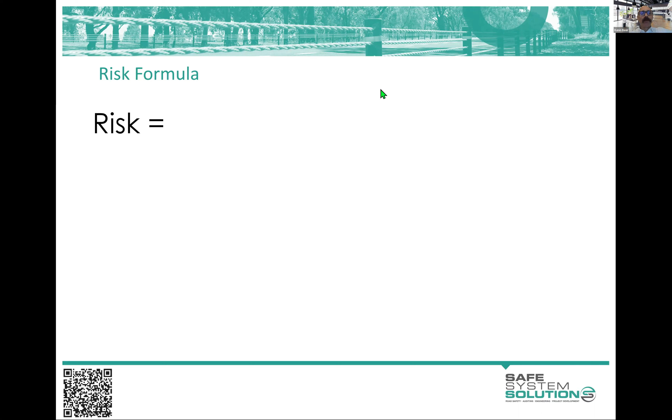Why not? I'll give a quick prize out for somebody who can give me a formula for risk. Anybody got the international formula for risk? Can anybody in the chat pop that down? Risk is something times something. Well done, Drew. Drew's on it. Prize for Drew. Likelihood times consequence is the international definition of risk, really.

And I'm not talking about just road safety risk. I'm talking about risk generally - financial risk, environmental risk, health risk. It's what is the chance a bad thing will happen, multiplied by the magnitude of badness. So what's the risk of recession? Well, it's the chance we go into recession multiplied by how deep a recession is. That's the risk of recession.

In a safe system assessment, we have used this as the definition of risk in road safety for a very long time. What's the chance of a crash multiplied by how bad is that crash going to be? Is it going to result in death and serious injury, or is it going to be just a minor fender bender, little scrapes in the car? That's the road safety risk.

In a safe system assessment, what we've actually done is extracted out exposure and the likelihood. So what does that mean? Well, that means how many people are exposed to this risk. Then what's the chance of it transpiring in a crash? And how bad will those crashes be? So that's how we're thinking about risk in a safe system assessment.

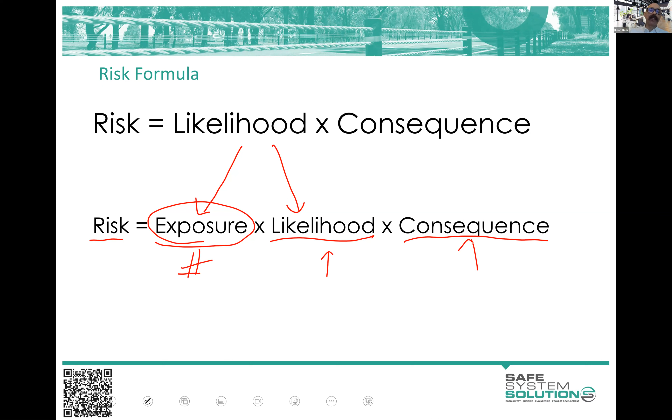So I'll go into that in a lot more detail, but just to help you clarify that in your mind - what are we talking about? Things that would affect the exposure to crashes on the road network.

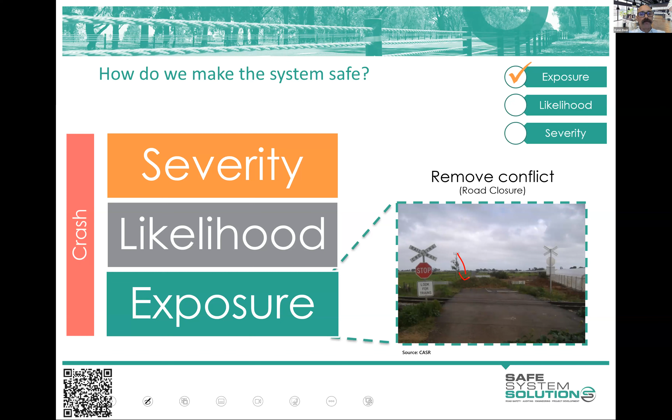Well, here's a photo. It's a little bit hard to see, but they've put a mound of dirt and a road closed sign on the other side of this railway level crossing. They have removed the exposure to crashes at this location. Okay, so that's an exposure example.

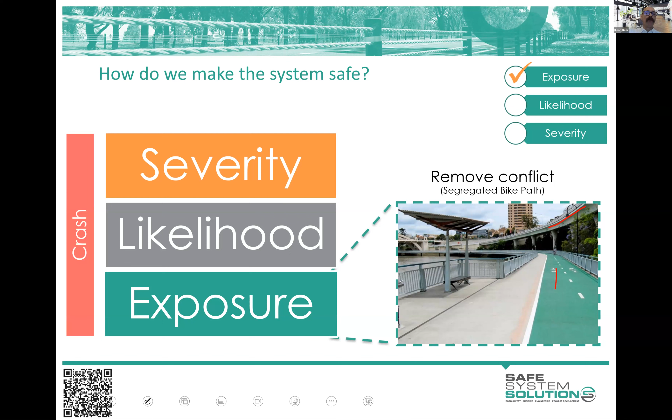Another example of removal of the exposure to crashes is if all of the cyclists and pedestrians are on their own separated path, not mixing with vehicle traffic - there is no exposure to vehicle to cyclist crashes in this, or we've lessened that exposure. There might be exposure to cyclist to pedestrian crashes, sure, but that other crash type, we've virtually eliminated the exposure.

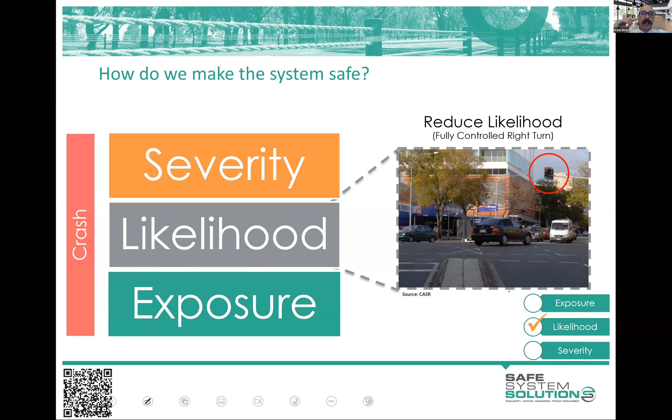It's just lessening the chance that they will happen in the first place. Traffic signals, they are all about the likelihood of crashes, trying to stop people crashing in the first place. This is an important thing to do, but remember, that's what a set of traffic signals does - it reduces the chance of crash.

The severity of the crash, when it happens, well, we really only have a small handful of things that we can use to influence the severity of crashes. We've got the speed, the mass of the vehicle, the angles that crashes happen at, the vulnerability of those involved, and the ways we absorb or dissipate energy. Because this is a physics sort of equation that we're working with here - it's the kinetic energy equation we're working with. When the crash is happening, how is the energy being managed?

How much energy is there, and how is it being managed? So if you can slow vehicles at the points where they're going to crash, we lessen the energy transfer.

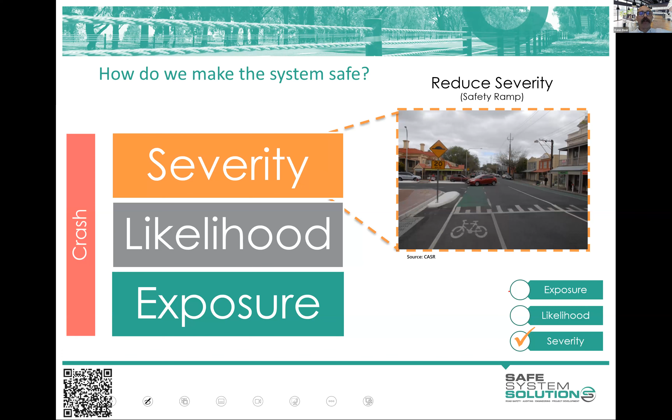Speed, or velocity, is a critical part in the energy equations. So something like a raised platform, slowing vehicles at that crash point, the conflict point, will lessen the severity of crashes. Or take a system like a road safety barrier: a vehicle hits the barrier and dissipates its energy over time, slowly coming to a stop rather than hitting a tree with an abrupt stop, or a culvert. That is about lessening the severity of the crash.

As soon as they hit that barrier system, that's a crash, but the severity of it will be less. Throughout the slides I use for the rest of this training, these little things will pop up, and I'll be saying, well, okay, barrier systems are all about the severity of crashes, which is a nice tick there. Sometimes things might influence both the likelihood and severity, but I'll help you out with that, because an important thing you need to be able to do as a safe system assessor is categorize things into either influencing exposure to crashes, likelihood of crashes, or severity of crashes, or some combination. So I'll be asking you to do that quite a bit throughout this course.

In fact, I'm going to give you a little assignment. It's a quick assignment at the end of this session, and you'll go away, look at an intersection, and start to categorize things into exposure, likelihood, or severity. And you will be marked on that one.

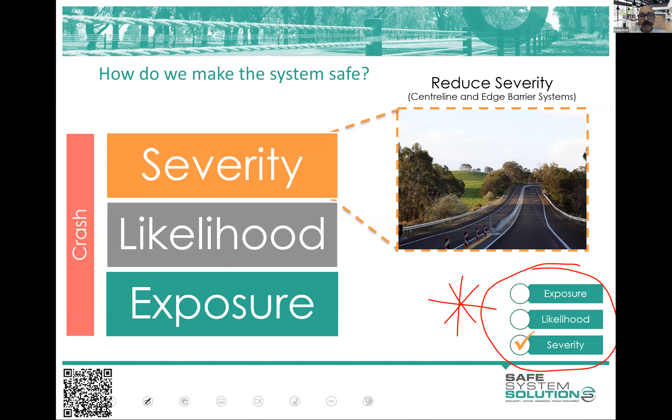Okay, so that's sort of caught us up to where we wanted to be at the end of last session. I'm just going to jump in here. We are recording.

This session is all about, I suppose, digging further into the infrastructure. We want to really start to unpack the kinetic energy thresholds for different crash types at intersections and at mid-block locations. How do we determine how bad a crash is going to be at an intersection? We'll delve into that. We're going to look at mid-blocks and intersections today, and fairly early on I'm going to get you doing a little bit of work around thinking about an intersection from that exposure, likelihood, severity perspective, and what we would do.

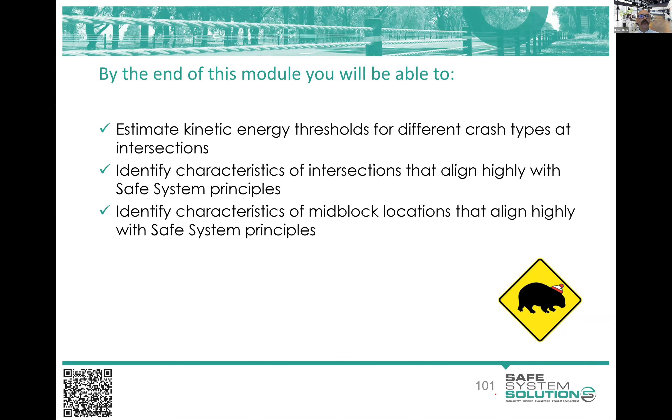Okay, so if you look at a route, for example, and I'll just draw a little bit on this here. If this is risk, and this is sort of chainage, you will see risk sort of bubbles along and then spikes. Okay, and it spikes at these intersections. It holds a certain degree of risk through mid-block locations, and mid-block, I mean between intersections, but it spikes at intersections.

It spikes at intersections because of, yes, this crash potential, but also vehicles are more likely to leave the road at intersections. They're more likely to leave the road because of another vehicle entering the intersection, and then the vehicle with speed avoiding that vehicle, or clipping the edge of that vehicle and spinning off the road, or a pedestrian stepping out, these sort of things happen.

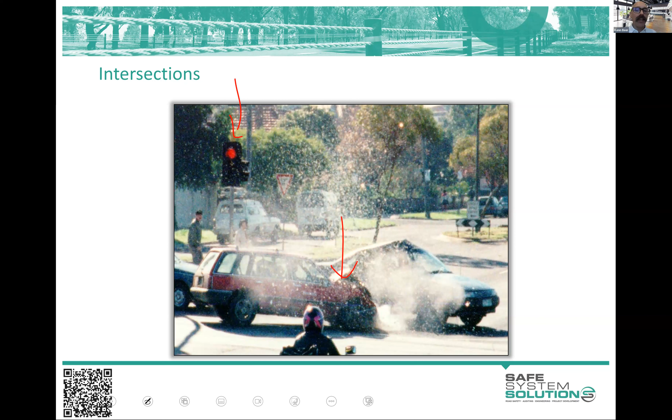Plus, we've made it much worse because they can hit a whole lot of solid things that have been placed around this intersection. So when we think about intersections, we want to holistically think about these types of crashes, the fact that pedestrians are going to need to be crossing, that we're going to have bikes coming through, but also vehicles leaving the road and what they hit.

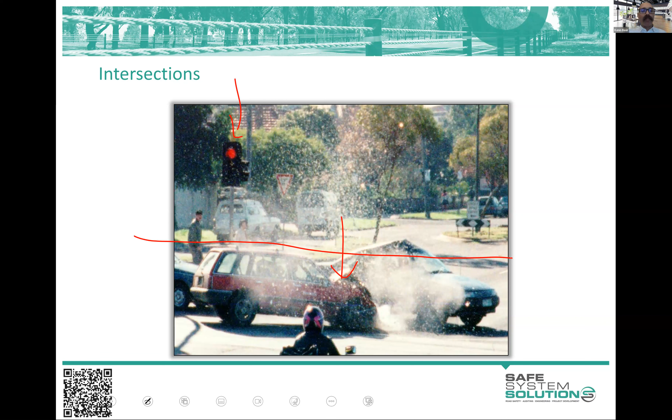Now, the Monash University Accident Research Centre came up with some general principles for safe system aligned intersections. These are very generic principles, but I think they're decent to think about. The first two are fewer vehicles and fewer intersections.

Can we get fewer vehicles going through this intersection, so lessen the exposure? Or can we have fewer intersections? Can we close off some intersections? Again, change the exposure. I always like people thinking about possible changes to exposure as an early thing.

The reality is it's very hard to influence exposure most of the time in practical reality, but we should think about it because it gives us our highest alignment with safe system principles if it can be done. If you're closing intersections, you've got to think about where are people going to now access what they need, or where are they going to come out, and are we just pushing the problem down the road? But nonetheless, it's a very good thing to think about.

Then when you're starting to talk about conflict point analysis and conflict at an intersection, that is a likelihood factor. So conflict points are about likelihood. Conflict points, if people don't understand the term, are basically the different spots at an intersection where crashes can happen based on the path of road users. I'll show you a conflict point diagram later.

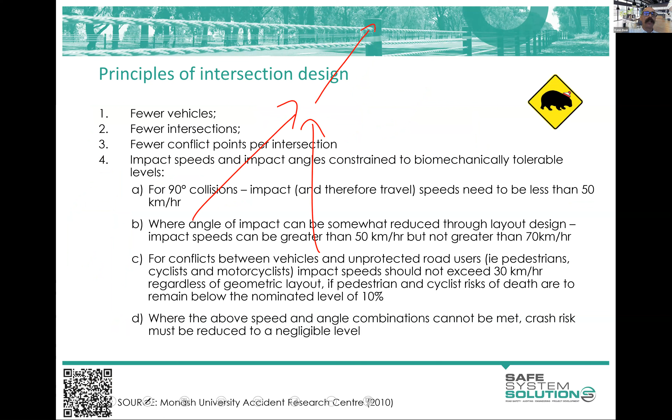Head-on crashes and the like, we're up around 70 kilometers an hour. Anything in between, if you can get some angle on your crashes, you're able to get around that 60 kilometer per hour mark. What do I mean by that? Well, go back to your year 10 vectors in physics class if you did it. If you crash at an angle, the energy gets pushed out to the environment more than crashing straight on, where it's a smaller exit of energy into the environment. You bounce off a bit, so if you're able to do that, you get some better allowance for energy.

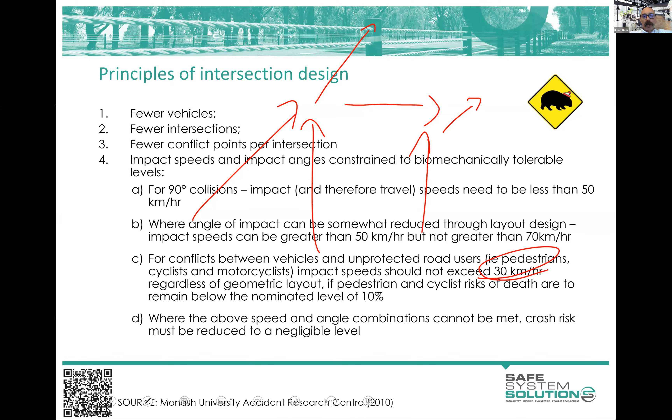Pedestrians, around that 30 kilometer per hour mark or below. So again, I've put some tables up here with these figures. I want you to really start to solidify these in your mind: 90-degree crashes between passenger vehicles, 50 kilometers per hour or below; get some more angle on it, 60 kilometers per hour or below; head-on, rear-end, 70 kilometers an hour or below.

The only way you can run an intersection above 80 kilometers per hour operating speed, not speed limit, is if you make it so that the delta V, the change in velocity, is within tolerable limits. You can have an acceleration lane, and the difference in speed between those vehicles sits within our tolerable limits, and we're okay.

You can crash two cars into each other if they're traveling 200 kilometers an hour and 210 kilometers an hour. That will be fine in the initial crash. You've got to think about how they leave the road then, if they leave the road. But that initial transfer of energy is within tolerable limits because the difference there is only 10.

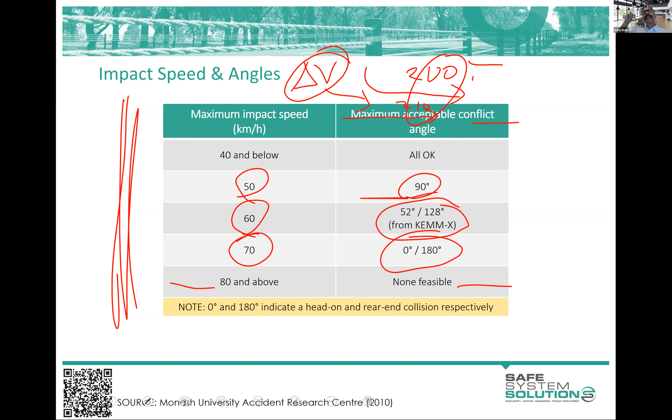So you can see that we're now starting to look at crashes from this energy management, this biomechanics of injury physics perspective. That's when the crash is now happening. How bad's it going to be?

So when you're doing a safe system assessment, you can start to come up with this sort of stuff. You don't actually need to be this precise on angles. I mean, if you're in CAD, you can easily do it, but you don't need to be this precise. You can simply say to yourself, okay, they're building a new intersection here, a vehicle coming out here being struck by a vehicle there, that's pretty close to 90 degrees, isn't it?

So that means 50 kilometers per hour is what we're thinking for the bullet vehicle speed. We want to be below that, 50 or below is what we want to get those vehicles down to at that point, because a crash is going to happen. Sure, we're going to do everything we can to stop that crash happening, but we've got to get our mindset in that it's going to happen.

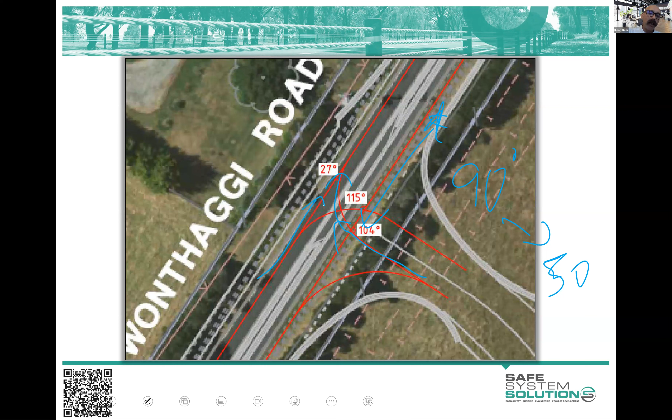So then we get over to the other side and we go, oh, okay, there's a bit more angle on that. So the energy's dissipated out a bit, 27 degrees. We can talk about 60 kilometers per hour for that side. That's about the threshold speed.

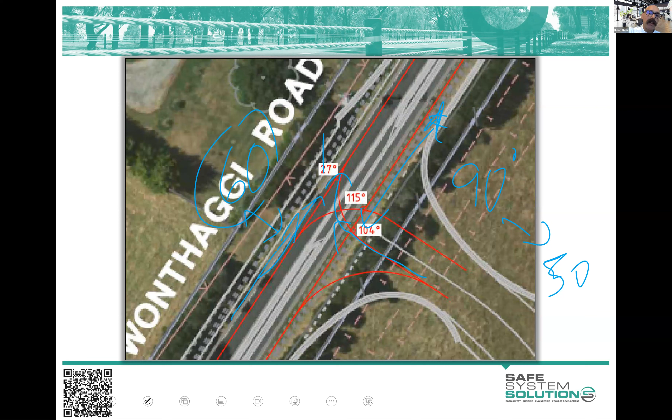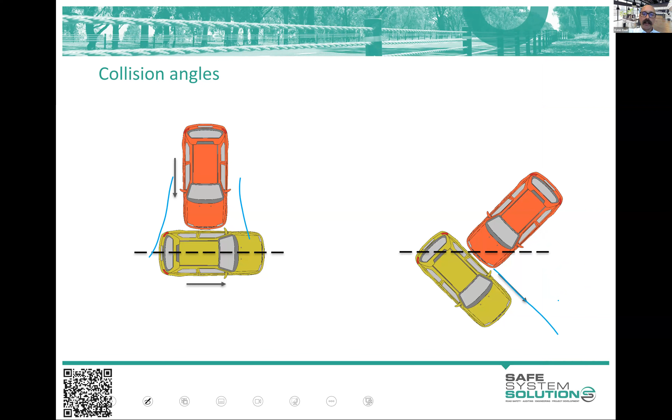Just a reminder there that we have secondary crashes to deal with at intersections. Vehicles hit each other, but they don't always hit each other squarely. Sometimes they hit the back and they clip off. They hit the front, they avoid each other, but they go off in these different directions.

And this has been a lot of clip off and the like. And of course, if you replot that to vehicles coming in this way, you probably don't need to do a lot of research. A bit of logic would say that, yes, okay, they're all going to, the bulk of them are going to be out in that area where they hit poles and culverts and have those secondary death and serious injury.

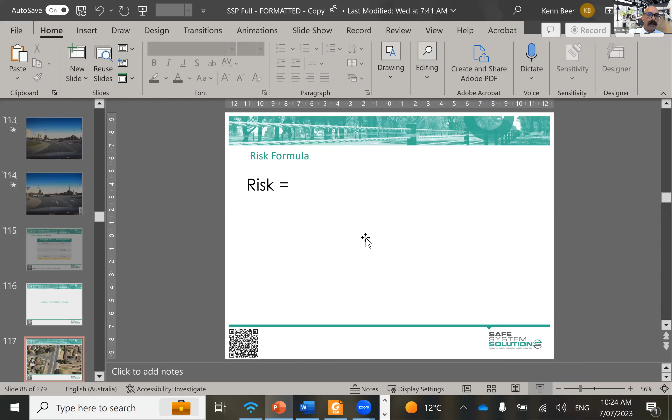Ooh. Oh no, what have I done? Okay. Running at 70 kilometers per hour. I'll just put 70 there.

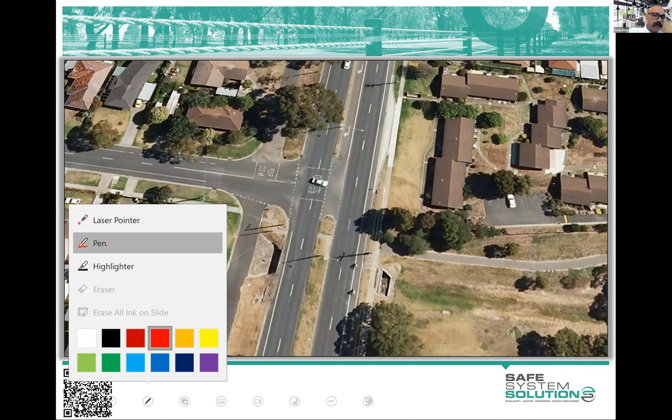And we've got a side road here, which is 50 kilometers per hour. The main road here, the highway, has 22,000 vehicles a day. The side road has about 2,000, maybe a little bit more.

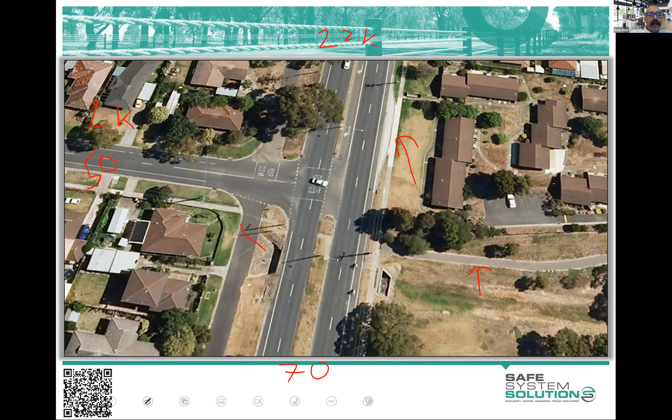That's a bus stop over here. You can see a shared user path here. This is a drainage structure, like a culvert. Water goes through there and out to this sort of area. We've got service roads here, two-way service roads. They're just servicing some houses. They've got some access points into them well further down.

Up the road here, set of traffic signals about 500 meters up the road. There's another set of traffic signals about 2 kilometers down the road, or maybe a little less. Residential area. There's a school down this road, maybe 500 meters down the road.

So let's have just a bit of a look here. You can see it from the view from the road here. You can see that's the side road vehicle coming out there. You can see a bus stop there. It's got lighting. You can see your two-way service roads over here.

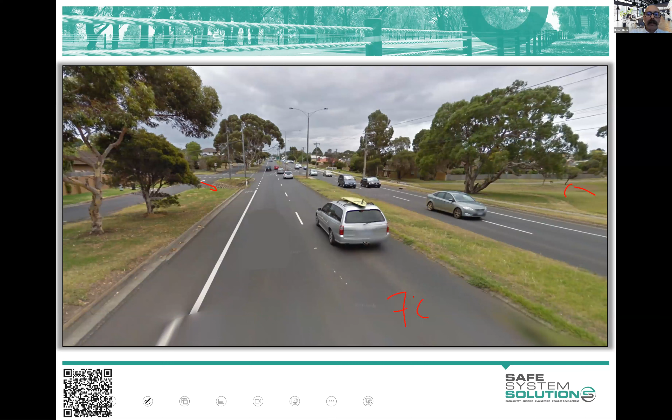From the other direction there, you can see that drainage structure. That's your shared path over there. 70 kilometers per hour. Remember I said on this road, 22,000 vehicles a day.

So what your task is to remove fatal and serious injury crashes at this location going forward. We want elimination of death and serious injury at this location forever. We want you to get as close as you can to that.

Now, I'm going to give you some constraints here. You got a budget limit. Now, because I like you, I'm going to give you an extra $1 million. You're going to have $4 million to play with here. So you got a $4 million budget.

You can't close off the intersection. I know you were saying to yourself, oh, no, Kenn said that Monash University Accident Research Centre said less intersections is a very good thing to do. It removes the exposure. But we've done the community consultation, and it's generally unacceptable, and we can't close off the intersection as you wanted to. So that's not an option. And in fact, what we need to do is ensure that at this location, people can get in and out in all directions. So even making it left in, left out is not really an option for you.

Now, the third one here is you're operating in your current political and organizational framework. So, if you're working in a council or in a department, I've got to suggest things that aren't like, I can't reduce the speed limit on the highway to 20 kilometers an hour because that's probably politically unacceptable at this stage. If you did want to do something like that, I would want you to come up with a little bit of a plan about how you would make that happen.

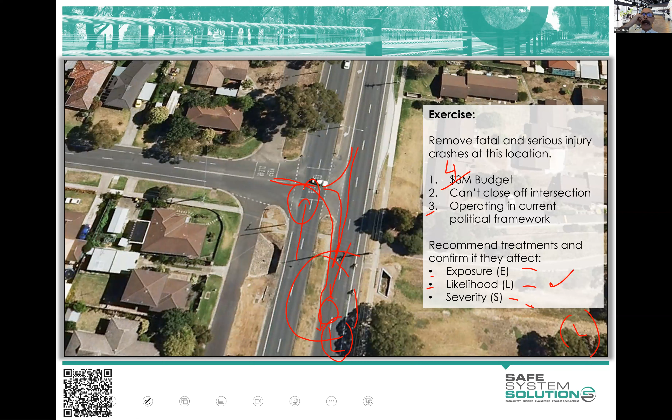There is a New Zealand tool, a seagull assessment tool, which is actually quite good, which shows you where a seagull-style intersection will increase risk and where it will decrease risk. I'm not a fan of them, but some jurisdictions use them a lot.

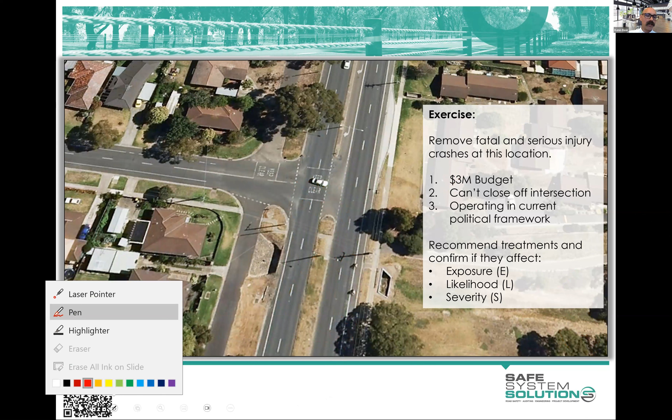Nonetheless, it's an interesting one to point out. Now, where were we? We were going through signals. So we've got lots of people landing on traffic signals. Sorry, lots of great stuff here.

Okay, then we had the idea of trying to get more people onto the buses and reduce that exposure. That's out of the box thinking. I like that, and it certainly has some alignment with safe system principles if we could do it.

Barrier systems to protect road users from falling into those culverts and hitting things. So that is a severity reduction technique.

Then we've got a raised signalized intersection in there from Alan, both likelihood and severity. And that's right, that's spot on, because the signals are the one reducing the chance of the crash happening. The raising of it slows the vehicles down, which reduces the severity of the crash. We've got raised safety platforms, so that's the same sort of stuff.

Now, the idea of a roundabout in there, and people are talking about likelihood, severity, potentially even exposure. Well, a roundabout really influences the severity of crashes. We slow vehicles on the approach, and the angles are better, so the severity of the incidents is less. The reason we don't tend to talk about roundabouts as a likelihood-reducing factor, even though they reduce conflict points, is that they tend to create quite a few minor bingles, rear-end style crashes, little fender benders. I'll talk a little more about that shortly, but very interesting that people are looking into that. Well done.

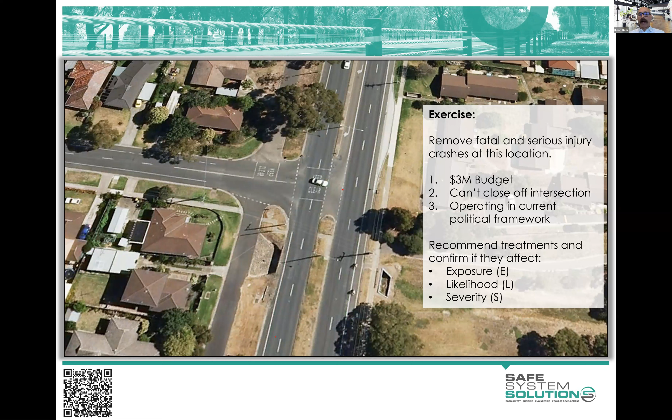Okay, I might use some slides now because, again, I want to say well done to everybody on that. I'll come back to this intersection a little bit and unpack a few things.

We really need to be clear in our mind that a set of traffic signals reduce the likelihood of crashes, but that's all they do. Now, there will be some situations where a crash happens at a set of traffic signals that if they weren't there would have been higher speed and more severe. So somebody's seen it, they've braked late, they've gone into the intersection, a crash has happened, it's a little less severe. But there is still abundant possibility for a crash to happen at the speed of the natural flow of that road.

The free flow operating speed can continue straight through that set of signals. Okay, yes, they've got a red light and they shouldn't go through there, but there's nothing physical to alter their operating speed. So that's why we talk about it as only likelihood.

Signals are really a fascinating thing to look at on the public road network because there's an impression that a set of traffic signals is the ultimate for an intersection, maybe until it gets grade separated. But when you analyze any population center in Australia, or pretty much around the world, you'll discover that the biggest source of death and serious injury are signalized intersections.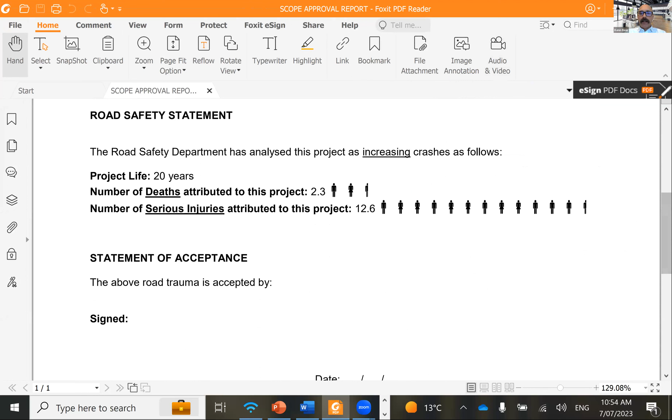The Road Safety Department analysed this project as increasing crashes as follows. So project life, you've got to put a life to a project, an infrastructure project usually, in order to do any sort of calculations on it. But we said the number of deaths attributed to this project was 2.3 over those 20 years, and the number of serious injuries attributed was 12.6. We put little people there just to sort of hammer home, these are not just statistics we're talking about. These are going to be people we're going to kill.

And then we put this sort of statement of acceptance: the above trauma is accepted by, and then left that line for the regional manager or regional director to sign. Now, did we get any of these back signed? No, of course we didn't.

Did we get some angry phone calls and then get asked to go into the executive director's office? We got the talking to of, come on, we've got to understand that a road authority's responsibility is to balance, and you're not thinking about the overarching improvement. I'm like, the whole intention of it was to actually vividly place this in people's mind. If we are prioritizing moving vehicles through there a little bit faster, and we say that's more important than keeping these people safe, somebody needs to sign off on that. Anyway, it caused a row.

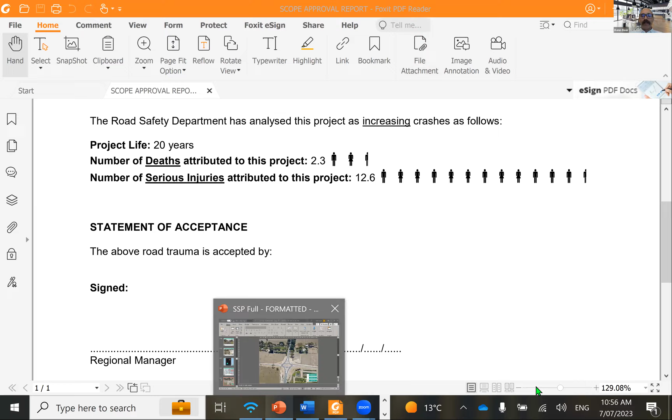We weren't allowed to put these on the front of them, and they all had to get destroyed, except I took a copy. But the idea that traffic signals are the be all and end all is not correct. Funnily enough, nowadays, if you do a safe system assessment, it's a much more palatable way to actually present the information we were presenting with that memo, which I'll get to.

Anyway, back to this. Okay, so a roundabout is all about reducing the severity of crashes, and it does an amazing job, actually. Now, I'm talking about passenger vehicle to passenger vehicle crashes here. We'll come back to pedestrians and cyclists at roundabouts because there are some problems and challenges for us to deal with. But if you're talking about an area maybe like this one, you can see here, fairly rural environment, not a lot of pedestrians or cyclists.

A roundabout is an exceptionally high-line safe system device. It reduces death and serious injury by about 85%, whereas a set of traffic signals gets about a 45% reduction in death or serious injury when going from a give-way sign to a set of traffic signals. Compared to a give-way sign to a roundabout, you're up at the 85% reduction. And it's predominantly coming from the reduction in severity of crash outcomes between passenger vehicles.

But we do have those challenges with pedestrians and cyclists. We also have challenges like the site you were looking at - you've got unbalanced flow. Roundabouts don't work as well with unbalanced flow. If you have a very minor road coming into a higher volume road, it won't work well. Mind you, you can do some pretty good tweaks.

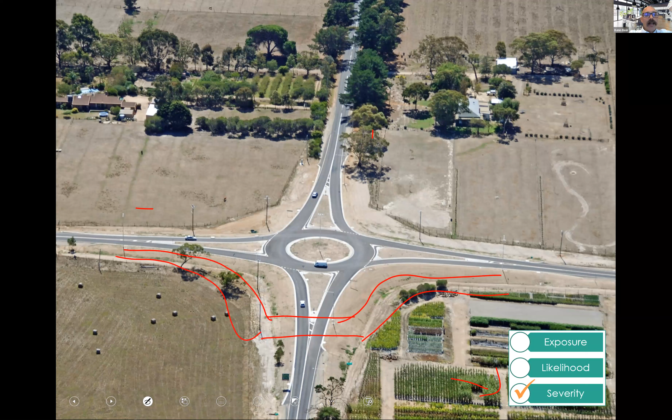With metering roundabouts, you put a set of traffic signals there that can nicely link into a shared path. I'm just designing up a nice facility here, but you just put a loop back in the road. So as vehicles bank back, they trigger the loop, it hits those signals, flushes some of them out. Those ones are going to get banked back a little bit. You can do things to get more out of a set of traffic signals, or out of a roundabout using some metering and other devices.

The whole point I'm making here is that traffic signals on their own have this high severity crash potential that just remains - it continues to remain. That is not existent at roundabouts because of the lower speeds and the lower angles.

Why do they need to be as big? Well, you can do small roundabouts. This is a very different road environment. You've lost some of that advantage of the deflection, but there's a huge advantage you get here from a safety perspective. That advantage is associated with anybody approaching this spot - nobody approaching thinks they have ultimate priority. So everybody approaching goes, oh okay, I may have to give way, I may have to stop.

Ultimate priority is a big problem associated with intersections. It's because people continue at speed and they're switched off.

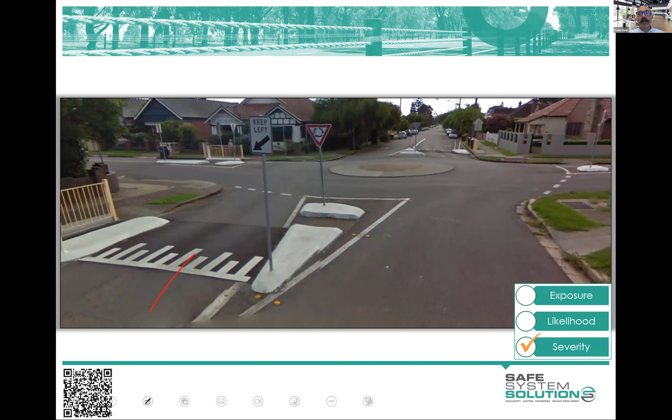When they've got a green light, they're driving along completely switched off, they don't change their speed, and they continue through. Same with give way control. A roundabout though, or even a four-way or three-way stop type arrangement, disrupts ultimate priority. And that's huge wins, people slow down, they look around, they wake up. If you're worried about fast speed through some of these, you can think about raised platforms, slowing vehicles on the approach, all sorts of opportunities.

Roundabouts do lessen the conflict points. So here's a conflict point diagram, vehicle to vehicle. I haven't put pedestrians and cyclists in at this stage, I'm going to talk about them in detail in the next session.

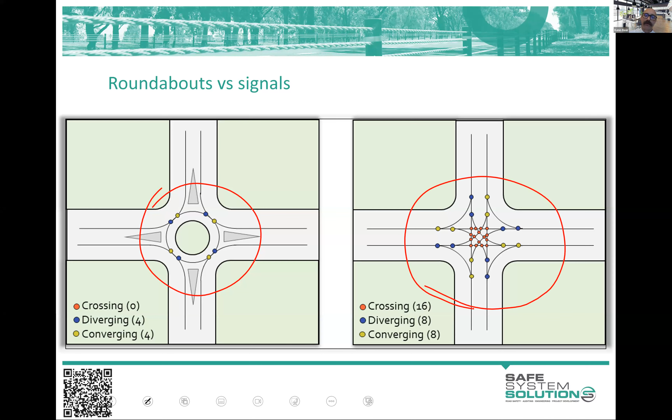At a passenger vehicle to passenger vehicle crash perspective, we see you've got fairly minimal ways you can crash at a roundabout, much more at a set of traffic signals or a give-way controlled intersection, and much more severe crash angle potential. Angle of crash is better, more energy deflected into the environment than this type of crash, so you bounce off a little bit.

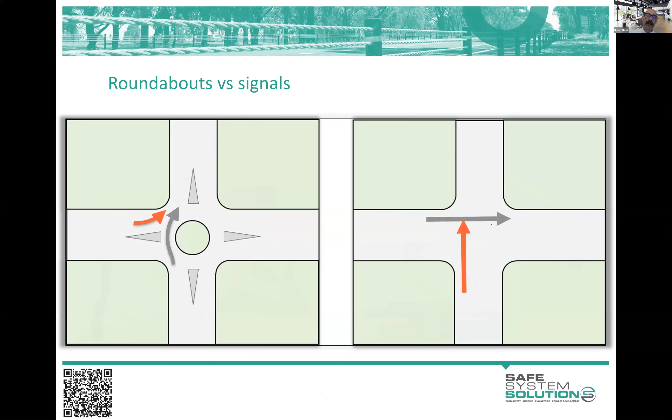This one's talking about how people drive in all states of consciousness. Gee, I wish everybody was alert and had a big night's sleep and their cup of coffee and was really attentive to the driving task. Well, they're not. People drive half asleep, thinking about the fight they had with their partner, they've worked a double shift and they're driving to their sister's wedding for two hours. We continue to work to try to lessen that sort of stuff happening, but so many people are driving not in a state where they're alert to the actual road network.

But if you put a lump of infrastructure in the middle of the road, be that a roundabout or some sort of geometric change, they come back to it, they wake up, they look around. If you simply put a set of traffic lights and the geometry of the road is unchanged, with no physical thing to navigate, they continue to be completely tuned out to the driving task. Like you would have done it, you would have driven and gotten somewhere and thought, oh my God, I can't even remember the last 5 or 10 minutes of driving. People get into these states, and it's not that they're bad people, it's just a task that is somewhat monotonous and people tune in and out.

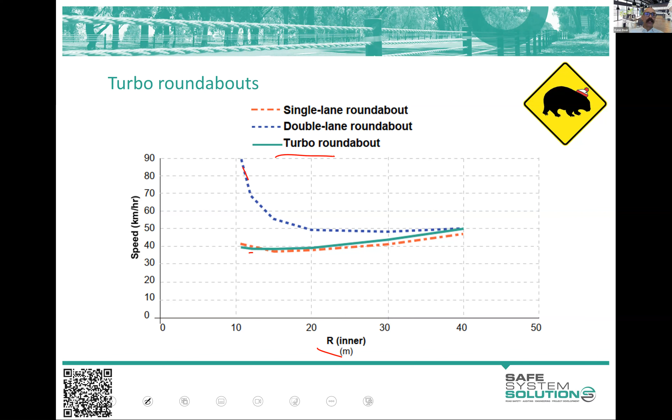I just want to show this because 2-lane roundabouts, especially with small radius in higher-ish speed environments, perform pretty average in terms of the speed people go through them, that's the blue dotted line there. Single lane roundabouts perform really good. And turbo roundabouts actually perform just as well as a single lane roundabout, even though they are a double lane roundabout. So I'll show you what a turbo is.

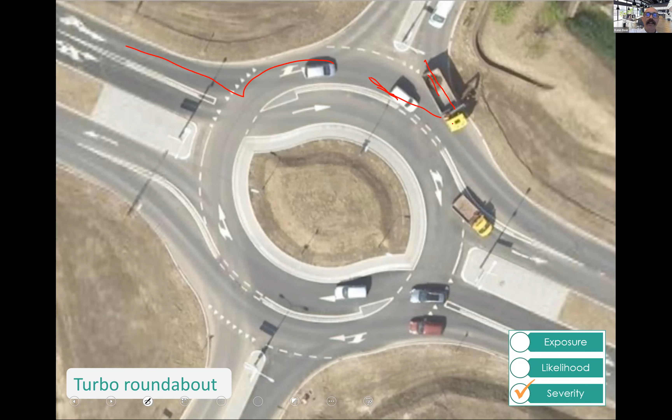There's no way that car is going fast enough. They've got a turbo style roundabout here, so they just cannot have the speed to be doing damage. Even if they hit that at a decent speed, look at the angle on that - it's beautiful, they're going to bounce off, it's going to be great. So this mistake has been absolutely catered for by the design here and the choice of facility. That's safe system in action really there.

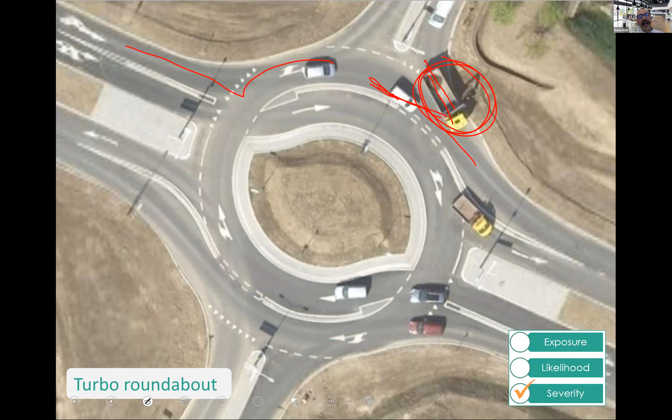This one's a bit of fun in the sense that you look at it and go, wow. I was asking a Dutch engineer about this - this is again from the Netherlands. We were talking about cyclists, roundabouts and design. I was just saying, well, this is fascinating, because in Australia these types of roads would just be a large signalized intersection. It may at some point get grade separated, but it would be a large signalized intersection, probably operating 2 roads at 70 or 80 kilometers per hour.

The Dutch engineer just couldn't fathom the idea that they did that. He said, well, but what about all the death and serious injury to your community? How would you justify that? I said, I agree, it's ridiculous, but it's the practice. The whole philosophy would be that they'd rather do this with this massive land take and complication than possibly run a standard crossroad signalized intersection. If you're on the ground - I haven't driven this - it wouldn't be as complicated as it looks from up here. It's signalized, you can see where you're meant to go. But anyway, I just thought it's an interesting one.

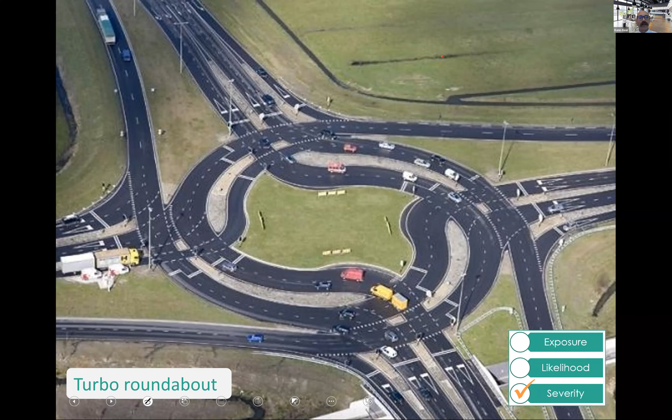But it's good to see people are working now on concepts for those large signalized intersections, to say, well, can we think about this differently? Can we take some of those elements we know align well with safe system principles - slowing vehicles down, making people more alert - and integrate those in? We're still getting the capacity through some of these areas designated as high volume traffic routes, which are part of our transport network at the moment.

These cut-through roundabouts are interesting. Again, this one's a concept - the other one was actually real. The idea being that the bullet vehicle coming through here, they're going to get disrupted, in terms of they won't be half asleep going through this. They'll wake up to look around, they'll slow down, they'll have a slightly better crash angle. So some advantages there.

It was really interesting to see that some of you asked about or suggested raised safety platforms on that little example we were doing. That's kind of heartwarming, because I've been running this course for about 10 years. In the early days, nobody was really interested at all in safe system assessments, but we were pushing to get traction and get a few people interested. Then in doing similar exercises, most of the time nobody would ever suggest a raised anything on that main road we were looking at on the highway. Certainly, at the start of my career, if I'd suggested any sort of vertical deflection, anything raised on a road with 22,000 vehicles a day, arterial on the highway, I would have been kicked out of the office - that would just have been ridiculous.

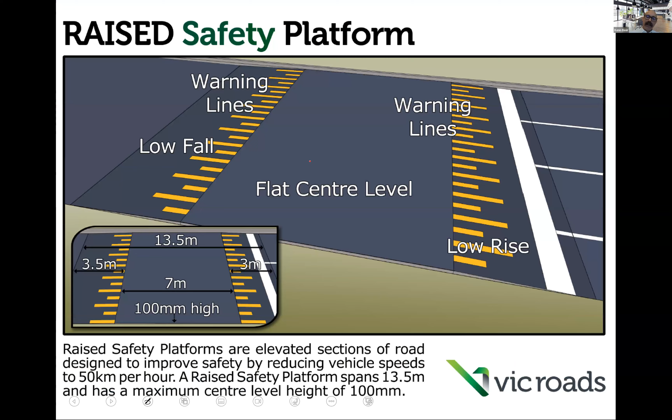And so that intersection, the concept that the region came up with - a lot of the thinking that you were all doing there in your 5 minutes, and it took a lot longer than 5 minutes for the region to work through this - was they said, well, we'd love a roundabout, except we've got unbalanced flow. It's going to be huge cost because of the size of it to get people around.

It'd be 2 lanes, so we'd either have to do some sort of turbo arrangement to run it, and it's not going to be the best. So traffic signals do seem to be the right option. We've got signals down the road and we've got signals back, so it's a consistent treatment of intersections, which has some advantages.

But then they said, well, hang on, if we build more signals, can we expect anything different to what happens at all these other signal locations in our city where we're seeing death and serious injury? Is there something else we could do? Could we slow down the bullet vehicles? The bullet vehicles are the ones that are going to do the damage if they run the red light, if they go through there at speed.

But vehicles coming in and out, they're target vehicles. They don't have enough speed to do damage in vehicle-to-vehicle crashes, so you don't actually need to impact on their speed. Even because it's a T intersection, you don't need to raise the whole intersection. You can just raise these approach points.

So they took this option and said, well, what about we do this? What about we know we can do just the likelihood with the signals, but we want to do something for severity as well. And so that's what they built.

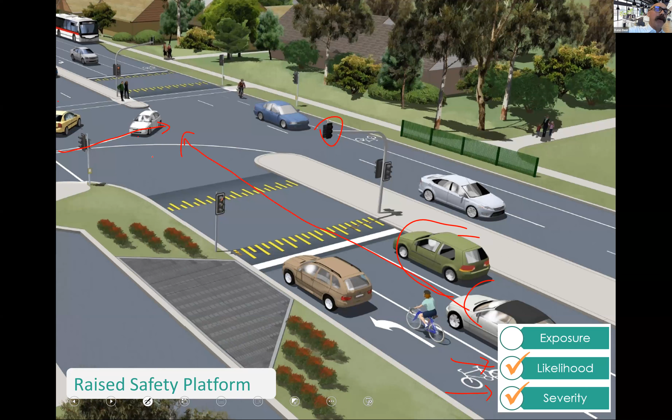And this one's out there. You can see it's a 50 km/h advisory speed. Why 50? Well, because if we go back here, a vehicle coming out, struck by a vehicle coming through here, is about a right angle. And remember, we said right angle, we want to try and get it 50 km/h or below. So that's what they're doing with the ramp grades. You can work out your ramp grade to the operating speeds you'll expect through - there's some good tools to calculate that. Advisory speeds to 50.

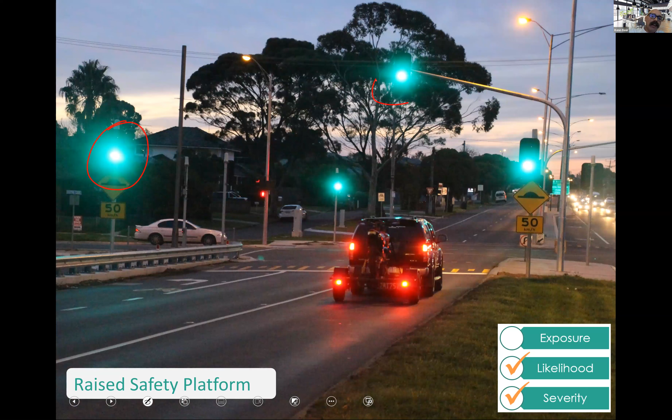And so there it is. Now, I was out there with a colleague doing the post-opening road safety audit of this, and this is a photo I absolutely love. I took it and we've got green lights, we've got the vehicle braking, which is saying that driver's alert. That driver is fully aware they're approaching this point. They're slowing down, even though they have absolute priority, right? They are doing that because they're approaching a higher risk spot on this road.

And yeah, I've got the traffic operations people who get angry at it. They jump me and go, oh, this is inefficient, we're slowing everybody down for this very rare chance of something happening. I'm like, what a load of crap. If we put a roundabout in there, everybody would slow down, and nobody complains about that from that perspective. But it's accepted - this is because this is new, people are pushing back on it.

So questions come in around, okay, well, what happens if a vehicle hits that at 70 kilometers an hour? Well, they don't - it's well signed and marked, and they slow down. Now, it is designed in a way that they will damage their vehicle a little bit. But it's the same question if you had this in an urban, lower speed environment. Say, well, what happens if a car hits a ramp that's designed for 20 km/h and they hit it at 50? Well, they scrape the bottom of their car out and they don't do it again.

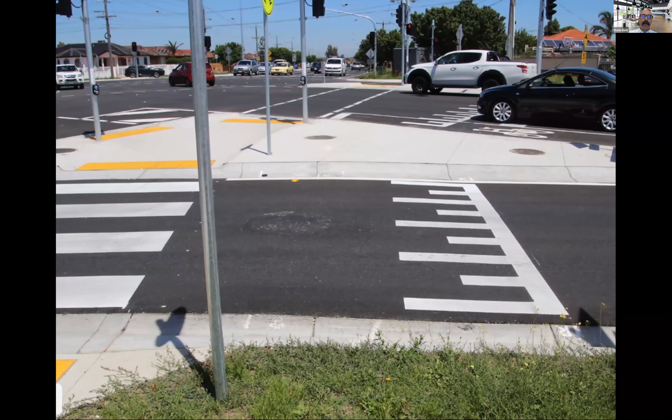Anyway, so we're seeing lots of these get out there, and there's lots of good design guidance on these now. This one I particularly like, a roundabout in Dalton, Childs Road, in the northern suburbs of Melbourne. Why do I like this? Well, this road here has 55,000 vehicles a day. It's a major bus route, heavy vehicles.

Childs Road has something like 25,000 vehicles a day. This used to be a 2-lane roundabout and it was saturated during peak times. There was a congestion easing program not very long ago. The congestion easing program said, oh, we should pull this roundabout out and replace it with traffic signals. But a safe system assessment was required as part of this.

Because the Victorian government requires safe system assessments to be done on these sort of things. The safe system assessment clearly said you are going to increase the risk of death and serious injury associated with vehicle-to-vehicle crashes because speeds will go up and the like. You should do something to slow speeds down. You should raise this intersection, or you should consider a signalized roundabout or other alternatives.

And so they went down the track of the raised intersections to get those speeds down as they go through. So you can see the safe system assessment did what that memo I showed you is doing, just in a much more palatable way. These are big roads, big traffic roads, but we're slowing vehicles at these dangerous points. So pretty good, pretty great outcome, pretty good example of safe system in action. I would've liked to have seen that as 30, but not 20. But anyway, that's little bits and pieces we can continue to work on.

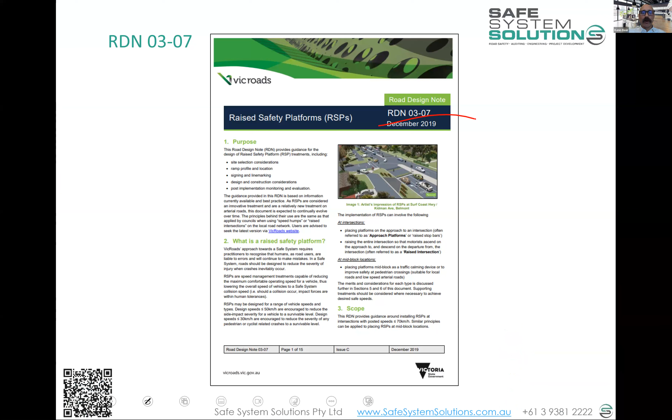So you've got Road Design Note 03-07. If you want specifics, you can look at that from other jurisdictions as well. It gives good design advice on raised safety platforms on major roads. Austroads has released the effectiveness and implementation of raised safety platforms, with an example from New Zealand and lots of other examples. If you're interested in the details, there's lots of stuff available.

I just have to stress this: I don't want you to feel that safe system means raised signalized intersections. No, safe system is a set of principles. It just happens that this is one way to play out those principles, acknowledging that people will run red lights or that there's potential for that. We need to engage them in the driving task, lessen the severity of crashes, and this just happens to be a way that can be done at these higher speed signalized intersection locations.

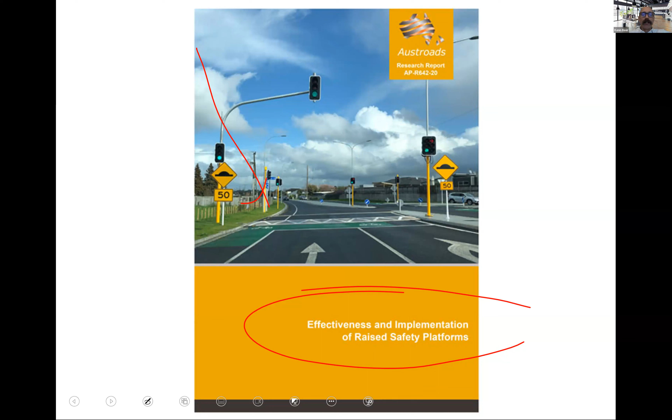Now I'll do one other example of safe system assessments playing a big role in how we think about managing energy within the road network. So this is a location where the arterial road goes around that way. It's got medium volume, I think around 5,000 vehicles a day, and you've got some more minor roads.

High-speed roads, 100 kilometers an hour on all roads. It did get reduced to 80 at one point, but there were still quite a lot of crashes and severe things happening. So the region looked at this and said, we'd like to build a roundabout at this location. They looked at that, and then discovered the roundabout was going to need reverse curves on the approach.

And then the roundabout itself had to be really big, and you had to have all this land take around it. It became a huge exercise in land and service relocation. There was a telecommunication exchange building that had to be moved out, which was going to be like $1 million in its own right to move. It was just a huge cost exercise.

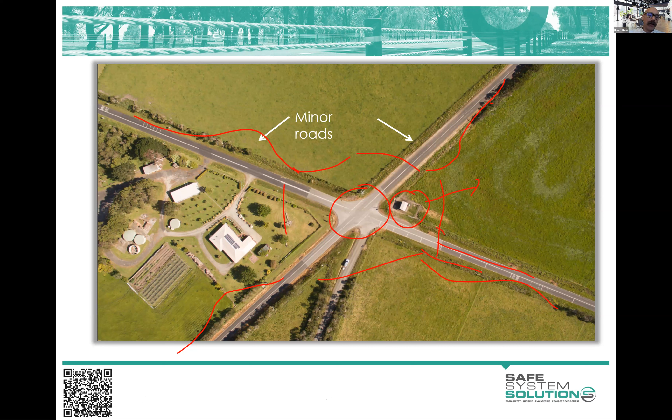So then they said, okay, we're going to do maybe some right turn lanes and some warning signs. The safe system assessment said, well, that will help a little bit with your right turn lane, reducing some likelihood of crashes. But you're still left with huge severity of crashes, and the energy there is still high. Is there something else that could be done to reduce speeds and improve angles and energy management?

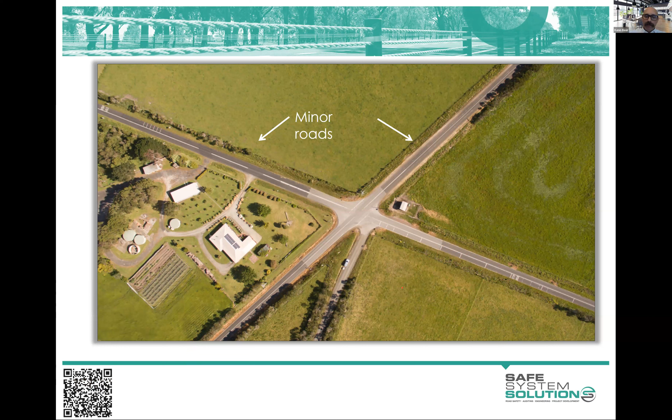So in this one, I was looking at what we could do with a smaller roundabout, without reverse curves on the approach. This again utilized some vertical deflection to slow vehicles on the approach, with a shallow raised platform, then raised the intersection to slow vehicles further. The reason for this slowing is you don't have those curves to chicane people in and slow them down. This roundabout is very small, actually that's the roundabout in the middle there, the rest is concrete apron, so you've got a sort of straight line possibility.

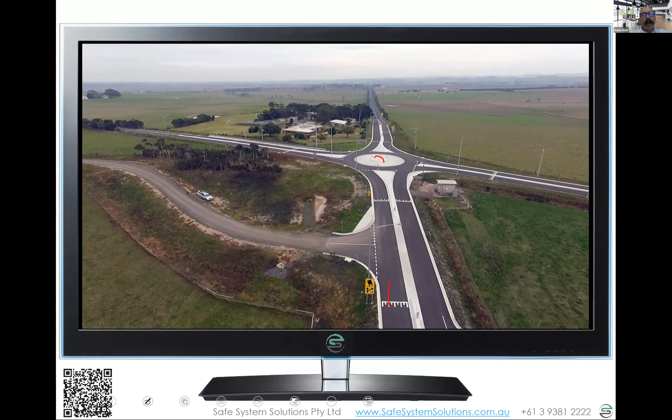So you're trying to slow people down. This one again was built. You can see those raised, shallow platforms slow vehicles on the approach, slow them down again, get them through. Small roundabout, then a big tracking area where a large vehicle can turn and track over that, with a bit of concrete apron over there too. That didn't have to move, so that saved $1 million in its own right.

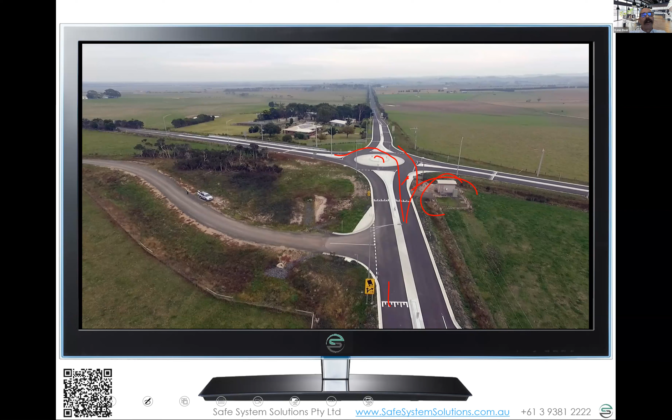So this is a bit under half the cost of the proper, big size roundabout. But that's not particularly the thing I'm interested in. It's the principles of saying we need to reduce speed, improve angles at these dangerous conflict point locations. It's now acceptable that we push harder than just some warning signs or a right turn bay or these sort of things. Don't get me wrong, those will improve safety a little bit in terms of reducing likelihood of crashes, but we need to substantially address the severity of crashes.

I'm going to pop up a little quiz here, and again this may or may not come up on your screen, don't worry if it doesn't. The question is true or false: traffic signals are not safe system.

True, false, or unintelligible question - meaning that doesn't make any sense, Ken. What kind of a question is that?

I'll let you ponder that for a couple of seconds, and then we'll keep ticking on. Hopefully I'm going to give you a little bit of time back this session to jump into that assignment. I'll give you a good explanation of it near the end. I'll give you another 15 seconds to have your guesses. Ten more seconds.

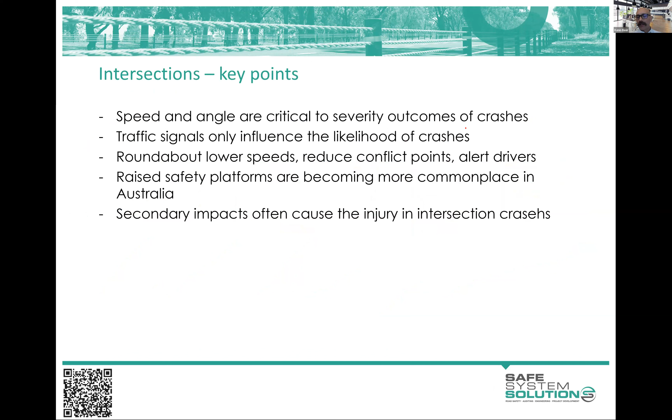And so here's a few sort of key points in there. They're in the notes to recap some of the thinking, so I won't read through each of those. But let's talk about lane departure and mid-block locations. So we're now between intersections. What are we thinking? How do we think about these locations?

I'm going to start with these high-speed locations. Next module, we talk about pedestrians and cyclists and more of these urban mid-block locations and how we think about managing some of the risks for vulnerable road users and the like. But if we think about these high-speed environments, 100km/h roads usually, divided by a line, a center line, maybe some sealed shoulders, a little bit of cleared area, and then some trees.

And the occasional sort of minor intersection and the like. I'll ask you, for this road, without knowing anything about it, what crash types do you think occur on this sort of 400 kilometers of road that continues on pretty much straight in this format? That's it, straight onto it, everybody. Well done. Run off road and head-on crashes. Absolutely, that's it.

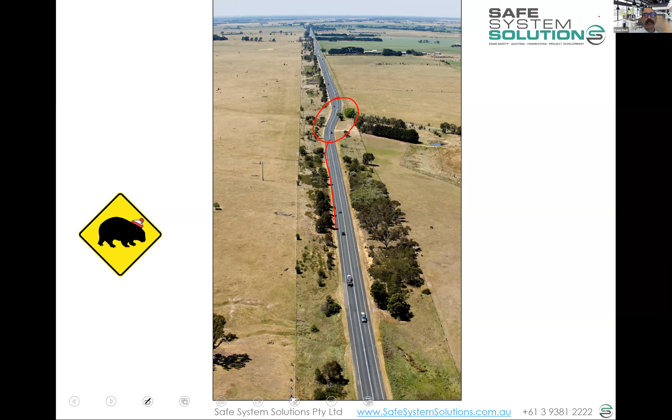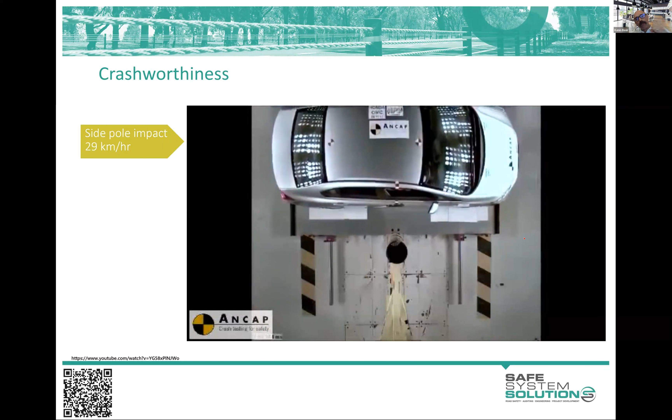When they leave the road and hit a tree - so what tends to happen is they're asleep, they've drifted off the road, usually to the left, just because that's the way the road is shaped in order for the water to leave. So they usually drift off to the left, and they wake up off the road, and then they turn the wheel really quickly to get back on the road, and that starts the vehicle yawing. And yawing is that sliding sideways.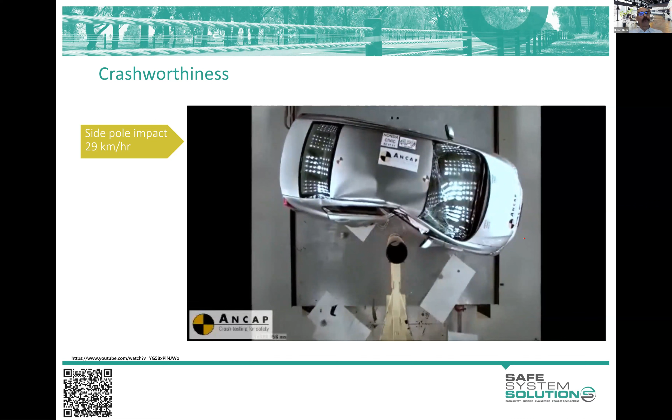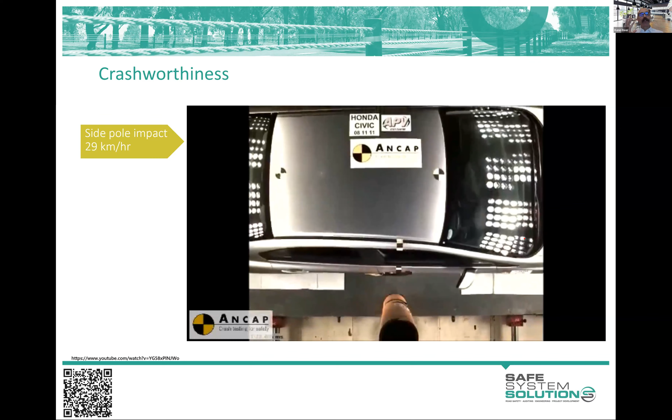Okay, and then we start to expose the side of the vehicle to point source hazards like trees and power poles and the like. So some people have this impression in their mind that a vehicle drifts off the road and then hits a tree straight away. Now, occasionally that happens, a drift off crash, but more often than not, we just see this absolute chaos happening as a driver's waking up in the roadside environment, traveling at 100 kilometers an hour, and we see all sorts of things happening.

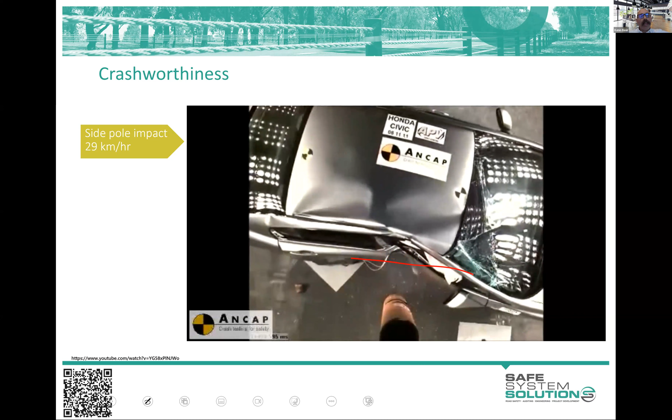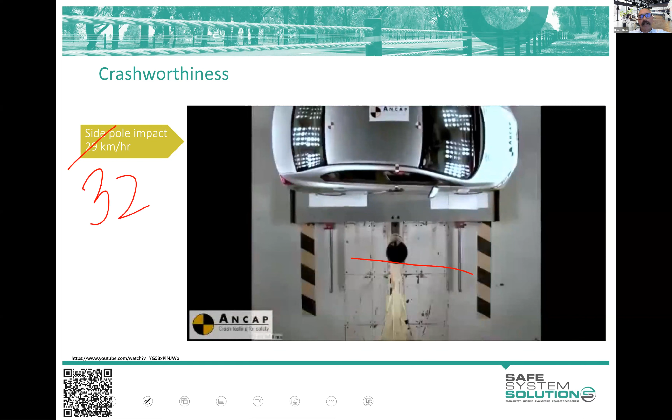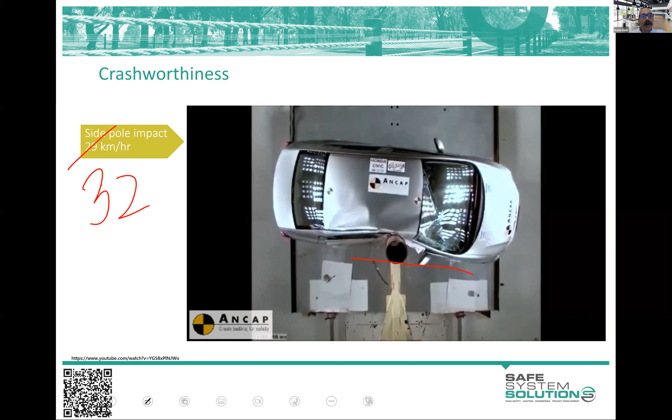There's a lot of exposure on the side of vehicles, and that side of the vehicle is horribly engineered for crashes. Even side curtain airbags only do a little to reduce the severity of crashes. We've gone up to 32 kilometers an hour, as I asked you last module, what's the speed that happens at? But we are nowhere near being able to survive side impact crashes at 70, 80, 90, 100 kilometers per hour into point source hazards like this, even in your best vehicles.

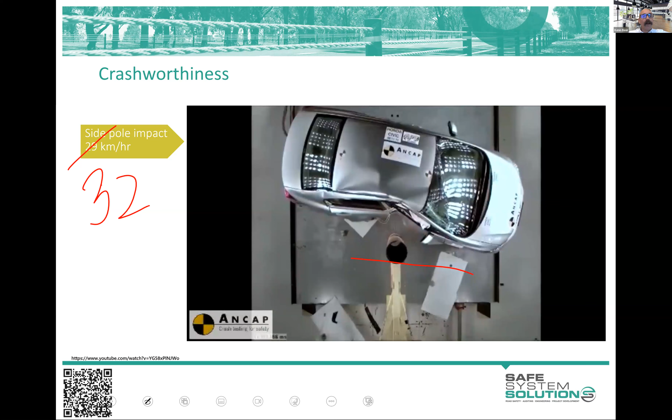Now, admittedly, the best vehicles are going to do a whole lot before you ever leave the road, and that's great. We're reducing the chance of the crash, but we do need to think about trying to manage the energy in these scenarios. Now, let's turn away if you don't like to see actual crashes, because this one is at

So we used to go with this concept of clear zone in these rural environments. Let's clear the road of hazards, clear the trees, move the power poles back, move the culverts out. So that theory, the clear zone theory, has been around since the 50s.

The research behind it was always a little bit iffy as to why they came up with certain figures. And what it really was, and there's been lots more research on it, shows that vehicles get some advantage because they can recover in these early bits, but then it sort of asymptotes out anyway.

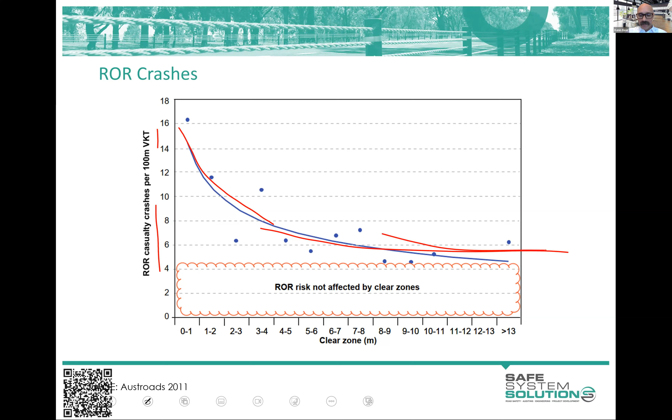There's a second really important point: we don't want to remove trees. We want to keep as many trees as we possibly can. The roadsides are wonderfully rich areas for biodiversity and lots of native vegetation, some of our sole remaining areas of good stuff.

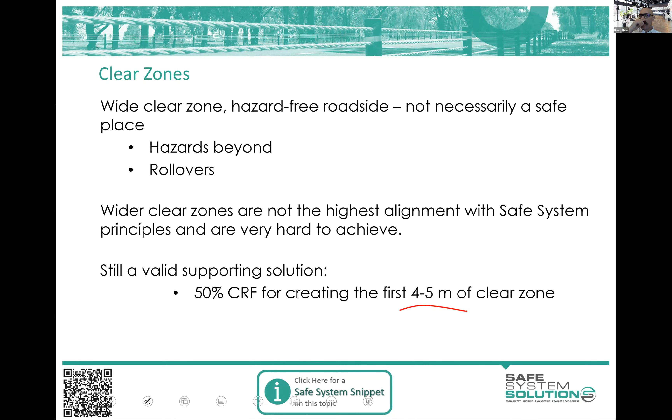So what we're saying about clear zones is, okay, a wide clear zone forever is not necessarily a safe place to be. People will go beyond these fabricated clear zones and rollovers can occur. The first 4 to 5 meters can give some real benefit, but the new... well actually, I'll come back to that.

And it absolutely boggles the mind that when Princes Highway duplications were happening up in New South Wales, you'd see these sorts of designs come out. The minister would cut the ribbon on a $1.5 billion upgrade. And then within a few months, a vehicle leaves the road, crosses the median, hits a car carrying a family - 6 people dead, in a brand new $1.5 billion road asset.

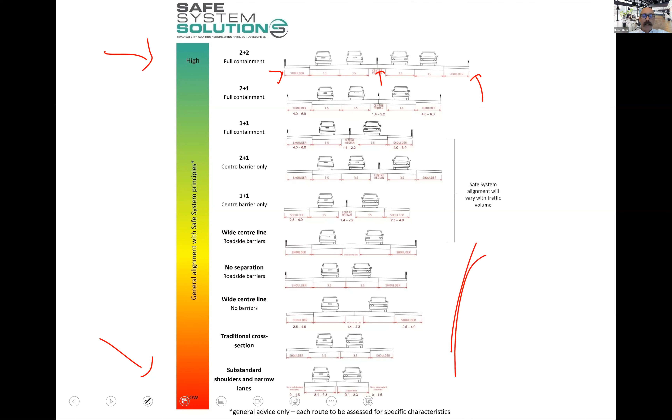Just a little aside, and I'll take you through your assignment shortly and answer any questions. Just an interesting one, hard to see here, but a road with this big, 10-meter-and-more cleared median, cleared roadsides, that's a 4-star road. We do safety star ratings of roads the same way your fridge gets an Energy Star rating. We can safety star rate your roads. It's part of iRAP or AusRAP, and you can officially do that. So 4 stars, that's not bad.

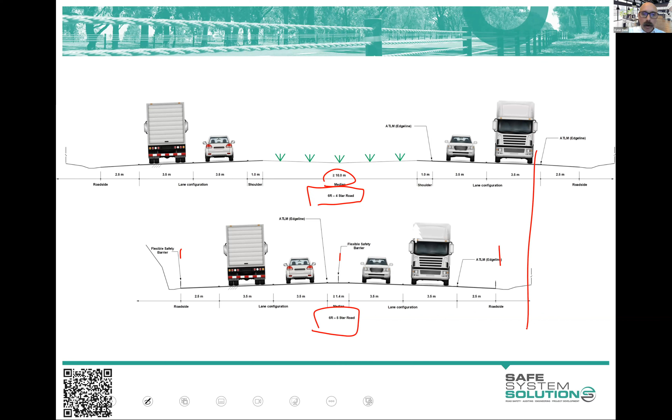But a 5-star road here has the barrier. You can see it's a smaller cross section, it's a smaller envelope we're taking as well. And that's our highest alignment with safe system principles.

I'll jump through those, they're in your notes if you want to look at them. Of course, there's a lot of detail in barrier design, thinking about how road users are going to use it, breakdowns, transitions, deflection, working with it. There's a huge amount of detail, so it's not as simple as just putting it out there. I'm not going to go through that. This is not a barrier detailed design course. This is about thinking about those principles so we can assess.

I'm going to finish with this one, then take any questions that come in. This is a high-speed crash that happened in Mildura. It involved a scenario that's all too common. It was 2 a.m., there were 4 young males in an old Ford, driving at a reasonably high speed. They went through a roundabout, and I just talked to you about how awesome roundabouts are. Well, this one crashed off the roundabout, but they hit a power pole. Now, all 4 passengers survived, minor injuries, leading a normal, healthy life, as I understand.

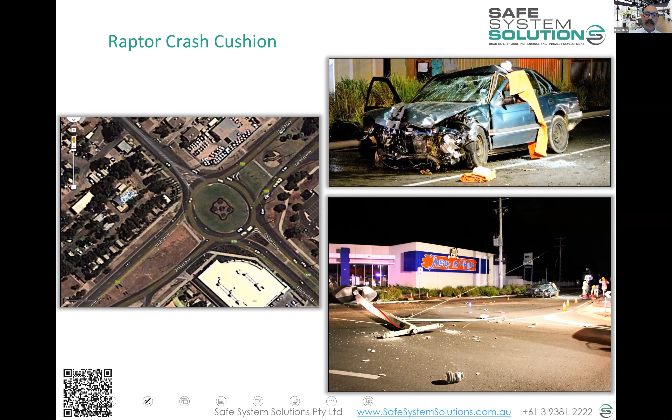There was a forensic crash investigation report that estimated they hit the power pole somewhere in the order of 90 kilometers per hour. Everything we know about the physics of a point source hazard says that they should be dead, or carrying debilitating brain injuries and injuries for the rest of their life. But this one had a thing called a Raptor cushion around it, and that is a really fascinating device. Again, I'm not trying to sell this device, but the principles of it are really good, because what it does is think about energy management, not just from the crushing perspective.

It is a cushion in its own right, but it also rotates. It's not connected in the ground, so it rotates and redirects energy as well. A vehicle will hit it and it'll also direct off as it rotates, which is a wonderful kinetic energy management thinking device. I just wanted to add that in.

The reason I end on that one is because it's yet another example of us thinking about the management of energy. The big change in our industry is that we now need to be thinkers of energy management in crashes. I think we've all been very comfortable with trying to stop crashes happening - good sight lines, good signage, warnings, these sort of things. But now we're thinking, okay, we've got all of that right, we have to get all of that right, but crashes are still going to happen. How do we manage the energy to keep it within these tolerable limits?

So barrier systems look terrible. Is anyone going to make them look any better?

Well, that's a really interesting question there from Joseph. So a couple of things on that. You can paint barrier systems, there's nothing stopping you doing that. There are some timber-faced guard fence systems that kind of look like a nice old wooden fence, yet sitting behind the timber face is the metal barrier system. And there's one of those that is MASH tested - MASH is the Manual for Assessing Safety Hardware, which is the test protocol we need to undertake to get a system approved.

It's only for lower speed environments, 60 km/h, 50 km/h roads at this stage. But often those do coincide with some of the areas that people aren't as happy with the look of barrier systems. But the barrier system's only there because there's usually the high speed potential for people leaving the road. So in those high speed environments, you can look to lower speeds and get your safety outcomes that way.